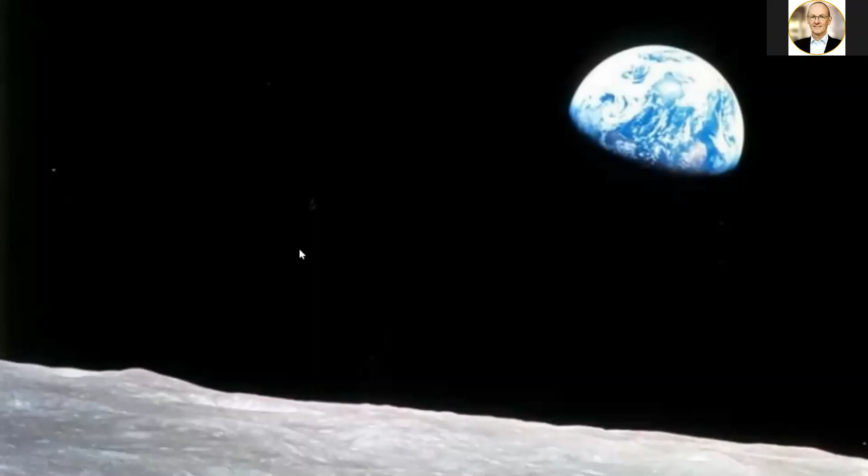So we start with the big picture, looking at the Earth from space, and think about the challenges facing us. The big challenge we have in front of us today is to stop this beautiful blue thing from looking like this dead grey thing.

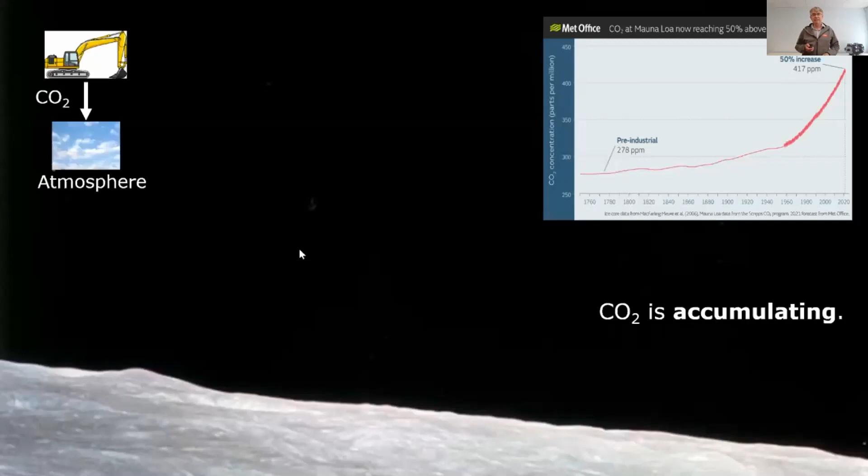And of course, CO2 is accumulating. Man-made CO2 is a huge challenge, and that is, if anything, accelerating. Sometimes it's tempting to think that we just need to cut down emissions and it will stabilize. In fact, CO2, when we emit it to the atmosphere, takes about 200 years to be absorbed in any meaningful amount by the sea, and then a further 10,000 years to turn to rock.

That really brings forward the urgency, the need to take urgent action, and the reason why this presentation is focusing on what we can do by 2030.

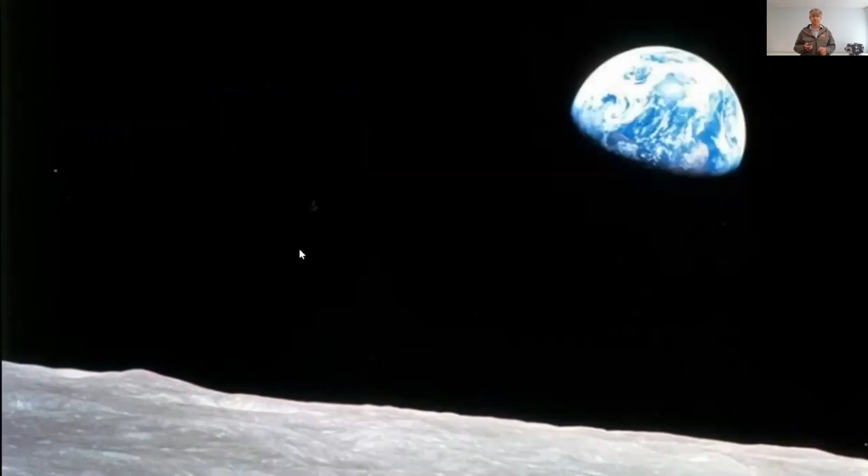As we see it, to avoid CO2 emissions accumulating in the atmosphere, we need a technology with highly effective emission reduction. We need that to penetrate the market to a significant degree, and we need that to happen as soon as possible. Those are the three elements of the equation we need to get right. It's not enough just to have an expensive technology that's highly effective but over the horizon, or never going to be commercially viable. We need to get all elements of this equation right to make a big impact.

So what is the total problem we're dealing with in construction machinery? Well, according to Danfoss internal calculations, it's about 400 megatons of CO2 emitted globally. And of course that's going up as the construction industry develops, with compound annual growth rate and the economy developing, that's only going to rise.

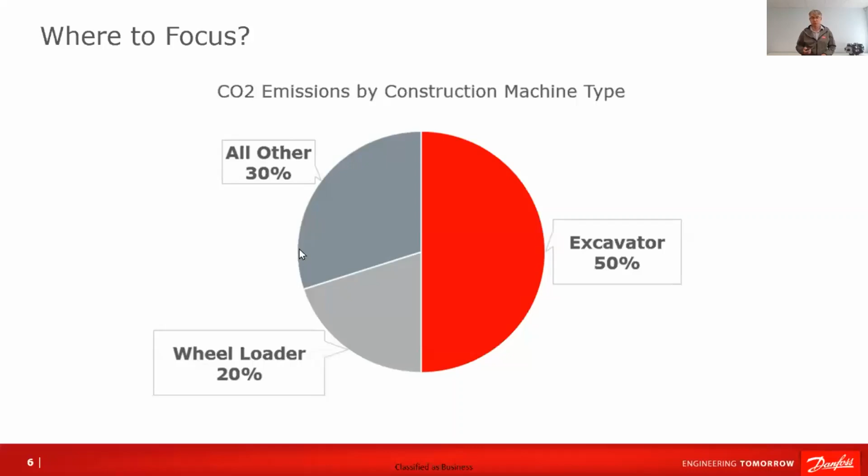In terms of where we put our focus, this pie chart is a bit of an indicator. For digital displacement, it's really focused us on the excavator, as the one application responsible on its own for 50% of those emissions.

So we've been talking in the last 6 months with some construction companies, some operators of fleets of excavators, and this is the sort of comments we're getting back. They're making their own targets to reduce equipment emissions, for instance 40% by 2030, but they don't know how to do it. They're being asked by some customers to produce bids with zero emission machines, but they simply can't get hold of the equipment. They're trying to procure less emitting equipment, but finding that the options out there just aren't there.

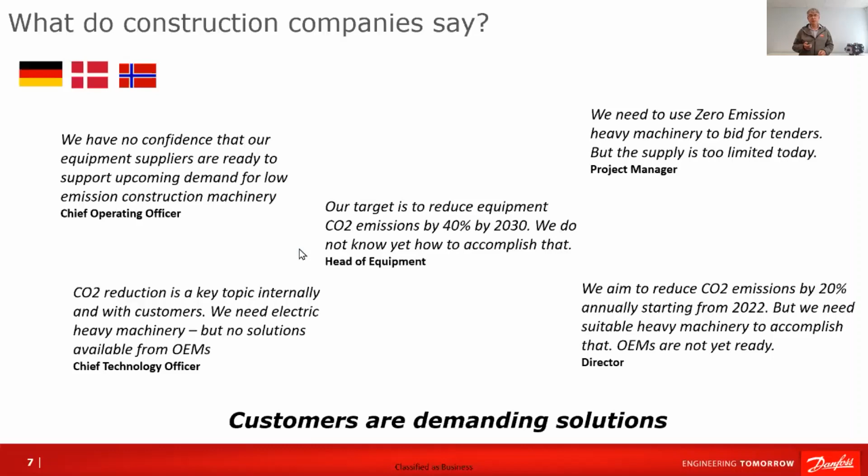On the other hand, many OEMs have committed—this is just a sample, and I think it's actually becoming a pattern across the board—OEMs are committing to science-based targets for the in-use emissions of the equipment they manufacture. Here's a sample of the sort of targets, typically looking at 2030 as a milestone and making some stretching targets there.

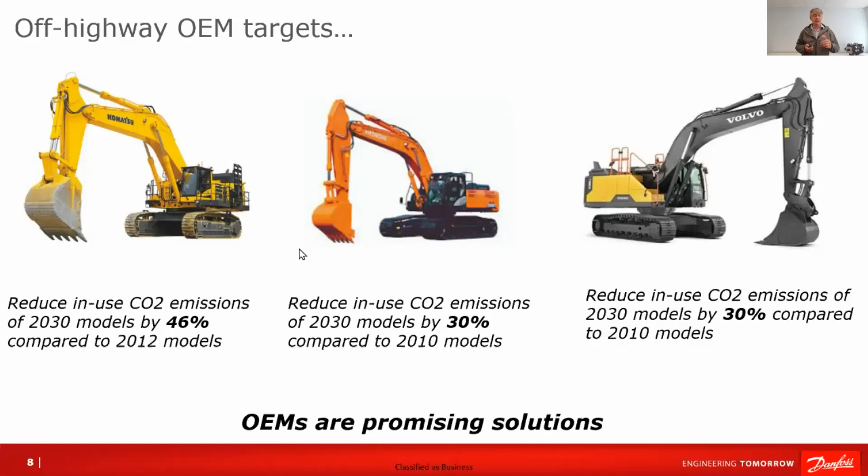So what's the solution? Well, the one that trips off the tongue, and that everybody maybe commonly assumes is the easy solution: let's just make them electric. We have green energy, offshore wind maybe for the UK, we use that to charge batteries, and we operate that green excavator using battery-powered, battery-stored green energy.

So yeah, sounds easy. But when we compare the challenge of electrifying, say, a 20-ton excavator with a typical family car, we see it's not going to be as easy as many people think. The excavator has a similar power plant capacity to the car, but a much more demanding system, with much more demanding actuators, and those actuators work an awful lot harder. The fraction of full power an excavator tends to work on is much, much higher than a family car, which is basically producing only 5 to 6% of its rated power on an average duty cycle.

The excavator, by contrast, is typically consuming 60% of rated power. So it's a very hard working machine, and of course it tends to work for much longer. As a result, when you multiply these things together, an excavator needs an absolutely massive battery, and that battery can be so expensive that it's more costly than the rest of the whole machine. And finally, it lives in this tough environment with poor charging infrastructure, which is a huge limitation on many job sites.

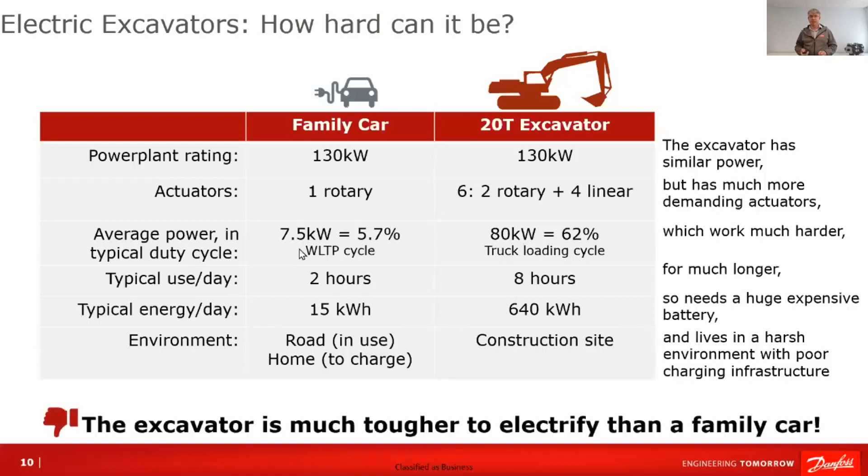There just isn't the electrical supply to charge these huge batteries overnight, especially because one of the first jobs of the excavator when it gets to the site is to dig a trench for the electrical supply. So the excavator is really much more difficult to electrify than a family car.

We could also ask the question, do we have enough green energy already? Of course, it's nonsense to charge a battery-powered excavator from fossil-fuel generated electricity. So that will be a limiting factor, and we can do some quick calculations to see if we're in the right ballpark.

We have roughly 1 million worldwide excavators in the field. When working, they take about 70 kilowatts to consume, working for let's say 1,500 hours per year. That gives us a total figure of 105 terawatt hours.

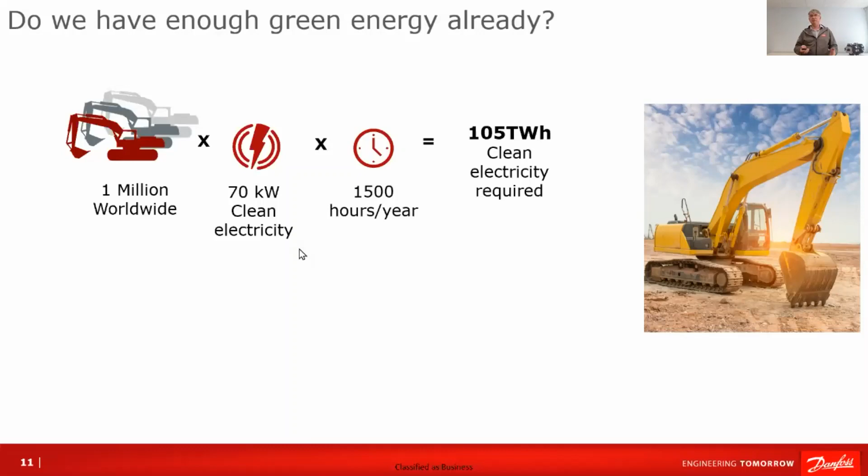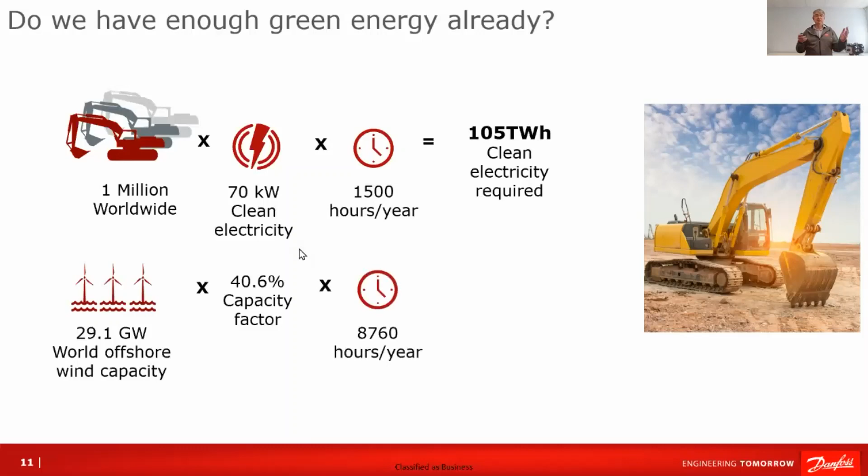So let's see what's available from offshore wind. There's about 29 gigawatts world capacity for offshore wind. It works at this 40% capacity factor, 24 hours a day, 365 days a year, and the result is about the same.

So the shocking figure is that if all the world's excavators were 100% electric, they would consume as much electricity as generated by the world's current offshore wind capacity.

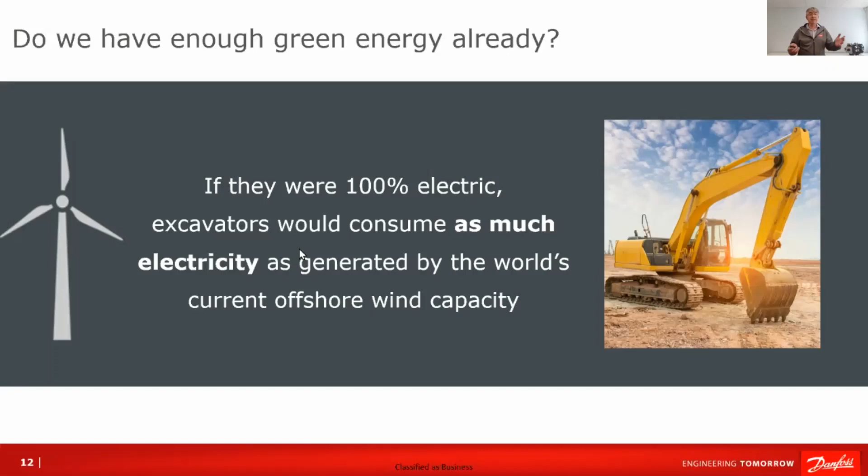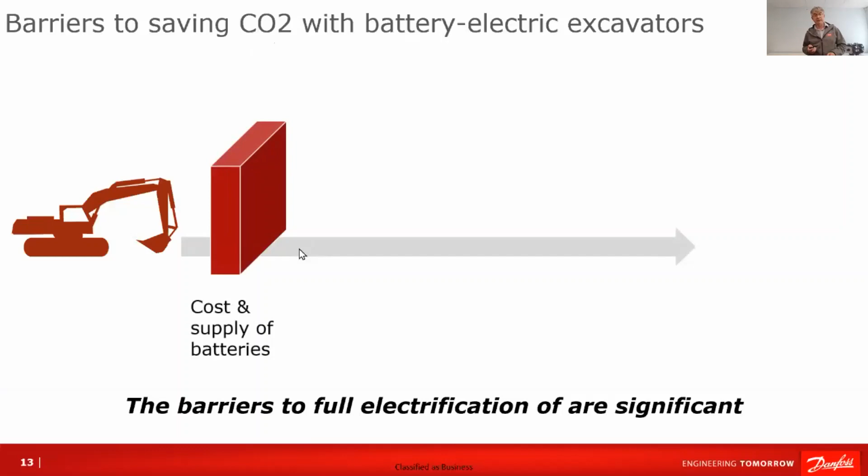So there are significant barriers to saving CO2 with battery electric excavators. One is the cost and supply of batteries, which of course will be competing with all the other consumers of batteries in on-road and stationary applications. The second is the lack of charging infrastructure where the excavators are actually used and stored overnight.

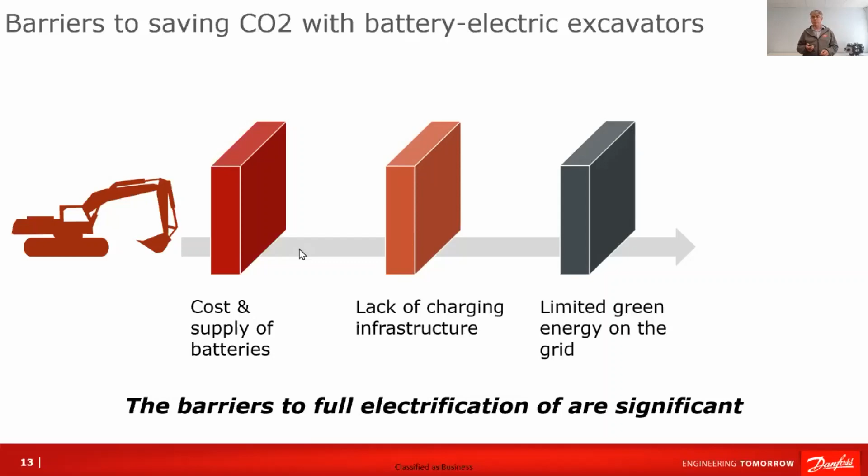And lastly, the limited green energy on the grid, which means that the growth of green energy powered electrified excavators will be limited by many other factors, including politics and government intervention to stimulate the growth of green energy. So there are real significant barriers to that electrification.

But to get a hint of what we can do—this is not a message of despair, but in actual fact there is a hint of what we can do, and it comes by looking at where the energy goes.

So let's look at the efficiency of transmission of the energy from that wind turbine to the end use. The wind turbine generates power that's then transmitted through the grid fairly efficiently to charge batteries. Those batteries can then drive electric motors very efficiently, and those electric motors themselves are very efficient. So far we have a very efficient transmission.

And then when we look at the city car, we have just a very efficient transmission coupling that electric motor directly to the wheels. And so overall, the city car is a very efficient way of coupling offshore wind energy into driving the wheels of a vehicle.

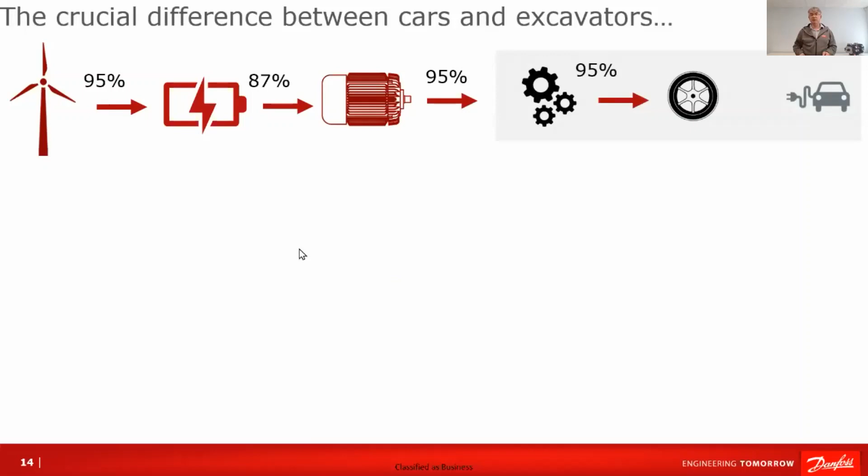But when we look at the excavator, it's rather different. Excavator hydraulic systems today—the shocking truth is that they're only 30% efficient. 70% of the useful energy generated by either the engine or the electric motor ends up as heat.

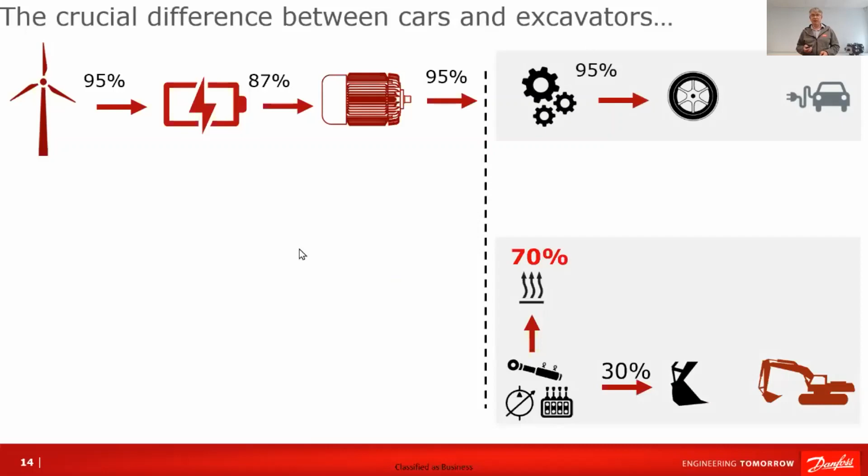And of course, heat you have to pay to get rid of. So this is a shocking fact. We could electrify all the world's excavators, but 70% of the useful power that we put in—that very expensive and valuable green energy—70% of that will be wasted as unwanted heat.

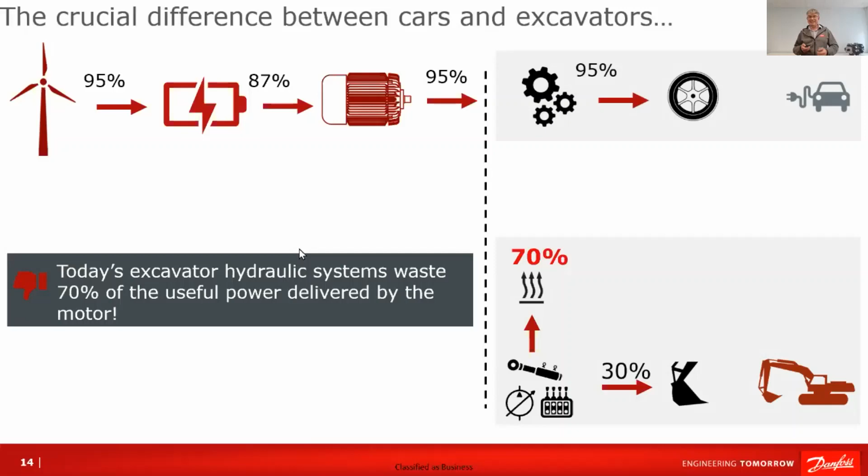And why is that the case? Well, it's to do with poor component efficiency in the hydraulic system, poor system efficiency, how the system is laid out and how it's controlled, and the fact that energy which could be recovered is not recovered. In fact, it's wasted and turned into heat.

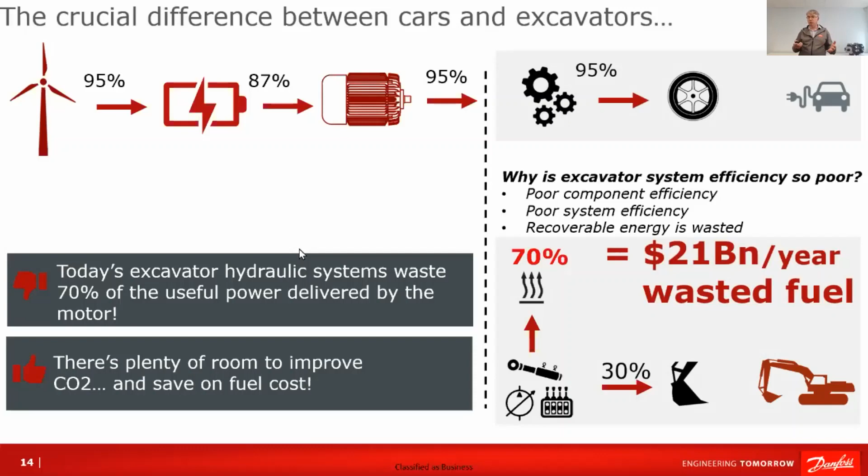So although it sounds like bad news, in fact it's good news. There's an opportunity here. There's plenty of room to save a lot of CO2 by improving that efficiency, but there's also a huge amount of cost opportunity. We've got $21 billion per year of wasted fuel—useful energy that's turned into heat that could be conserved.

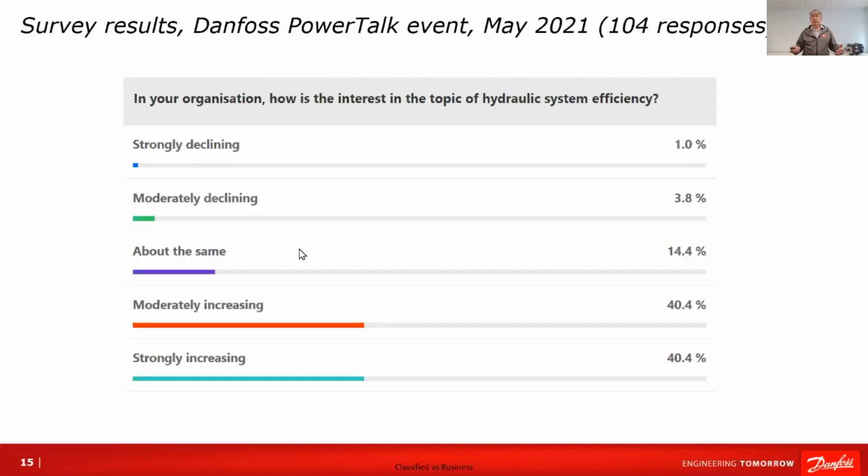And indeed in the UK, as the threat of diesel prices increasing affects the average operator, we could look at some solutions. And of course, everybody's thinking electric, so maybe the obvious solution is let's just go completely electric. Here's some sort of groundbreaking demonstrations that have been done in the last few years using electromechanical actuators.

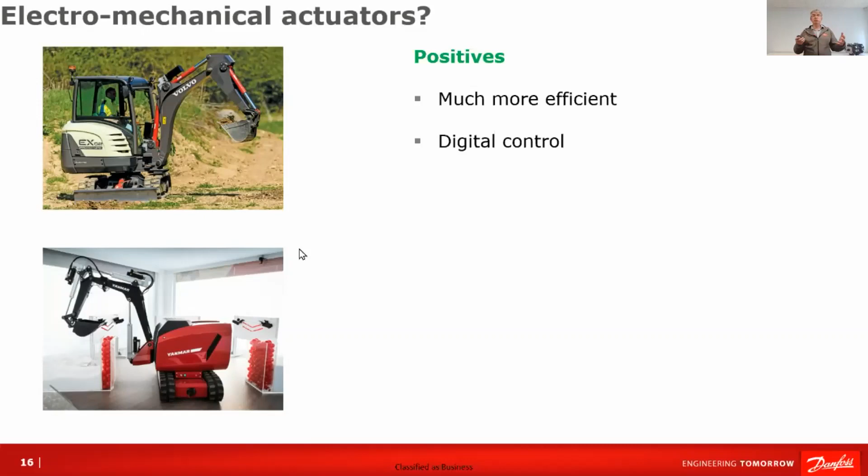Typically an electric motor, ball screw, or other mechanical mechanism moves the actuator instead of using hydraulic fluid. The positives are these systems can be much more efficient, and you get the electrified digital control benefit, so you can easily automate and have a better control experience for the operator. But there are negatives.

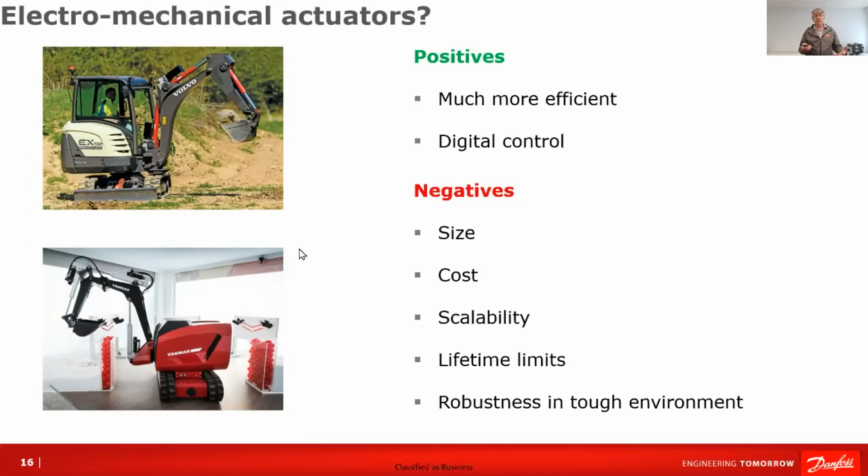Significantly, you can see on these photographs, these are very small machines, and already the actuators are huge, much bigger than the hydraulic cylinders they would replace. The cost of these systems tends to be prohibitive. There's questions about scalability, these demonstrations have been done in the 2-3 ton range. Will it scale up to 20, 30, 40, 50 tons that we need for large excavators? And there's fundamental questions about the lifetime of these actuators, especially in the tough environment of an off-road machine.

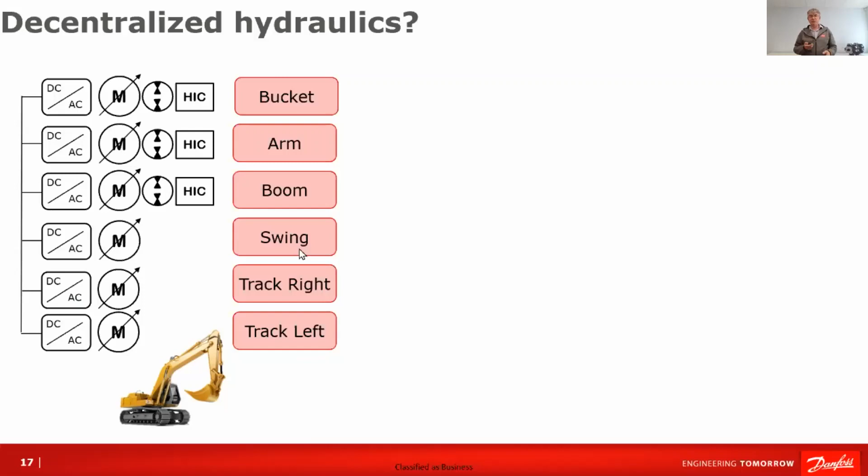So there's another option some are looking at, which we call decentralized hydraulics. We say, let's stick with the hydraulic actuator we know and love - it's very robust, power dense, and actually quite low cost - but let's improve the hydraulic system that feeds fluid to those actuators. Here's one idea: instead of having one pump and valves controlling flow to the actuators, you have multiple pumps, each fed with their own variable speed electric machine, connected in a DC bus and supplied from the battery. The positives of this system: you can improve the efficiency.

What we're talking about here is that the electric machines will not share their DNA with the diesel machines, meaning manufacturers will be investing in a completely different technology path. The question is, do we leave diesel machines behind? What if diesel machines are actually 95% of the market and therefore 95% of the emissions? Are we improving enough by focusing just on the electric fleet? Don't we have to improve the diesel fleet as well? So that technology divergence is one of the issues.

So that's the problem - we're going to give you some solutions. First, I'm going to hand over to my colleague Markus, who's going to introduce Danfoss's view, and then we're going to tell you what Danfoss can bring to the table as a solution.

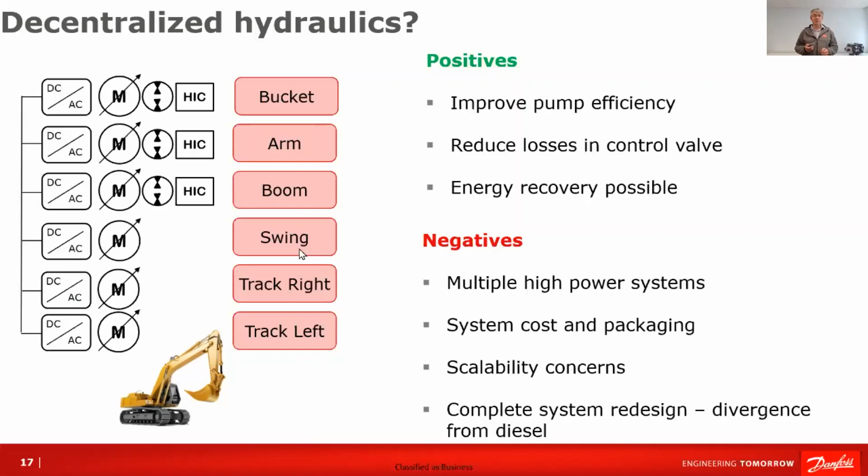I want to tell you something about who Danfoss is and what Danfoss is doing. What we do is we engineer tomorrow - we engineer solutions to enable the world to do more with less. That means we are developing the right technologies in all areas when it comes to heating, cooling, drives and power solutions. To do more with less - that's what Danfoss is doing.

We also have a climate strategy at Danfoss, which is quite ambitious and bold. This means we aim to become CO2 neutral by 2030. All Danfoss factories shall become CO2 neutral at the latest by 2030, and all company cars should be electric by 2030. So there are some ambitious goals Danfoss is setting for ourselves, and that's quite good.

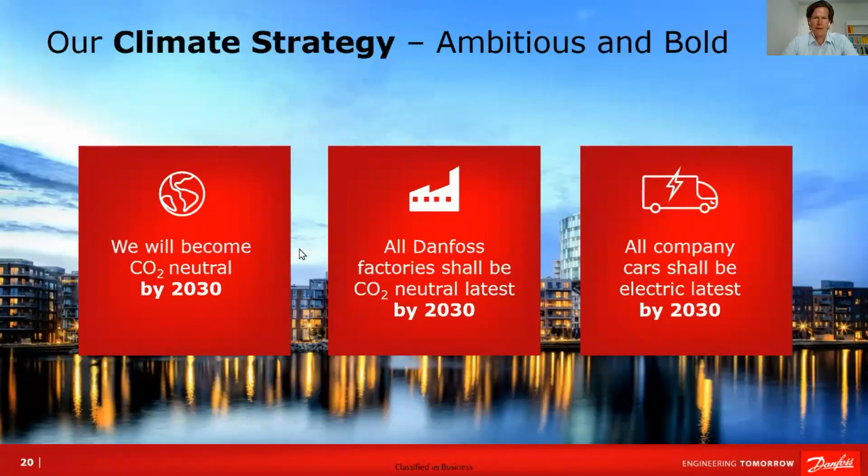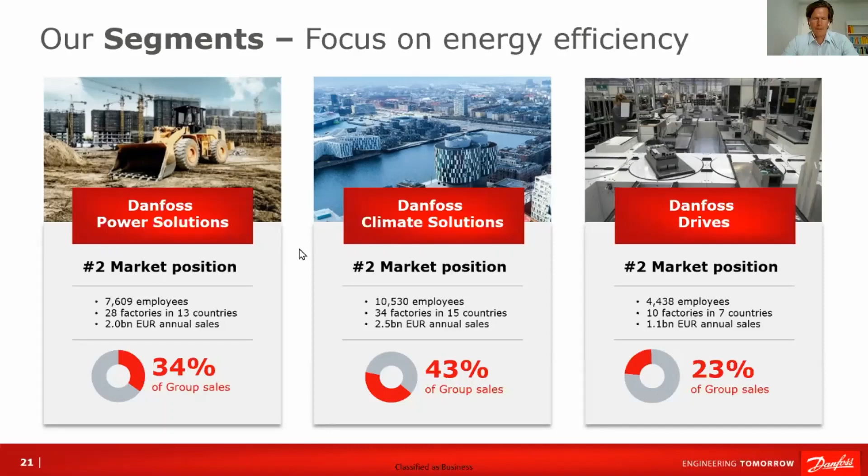So what are the areas Danfoss is in right now? We have 3 segments where we are active. One is Danfoss Power Solutions, the area where Niall and I work, where we are the mobile leader for mobile hydraulics for work machines, construction, ag machines, material handling and so on - for hydraulics, but also electrification as a complete solution provider. Then we have another segment called Climate Solutions, which comes down to heating and cooling solutions. And then we have Danfoss Drives as a segment, focusing on power modules, drives, and power conversion. So these are the 3 segments, and as said, we really try to become efficient in all areas, focusing on energy efficiency.

So when we now do one level deeper and do a deeper look into Danfoss Power Solutions, we had like 2 billion in sales and 7,500 people roughly in 2020, and this is the status of today. We are active in the global world here, but as you might have heard from the news, we are acquiring Eaton Hydraulics, and this does mean that our sales figures and our employees will change dramatically in a short time. Our top markets are USA, Europe, and China.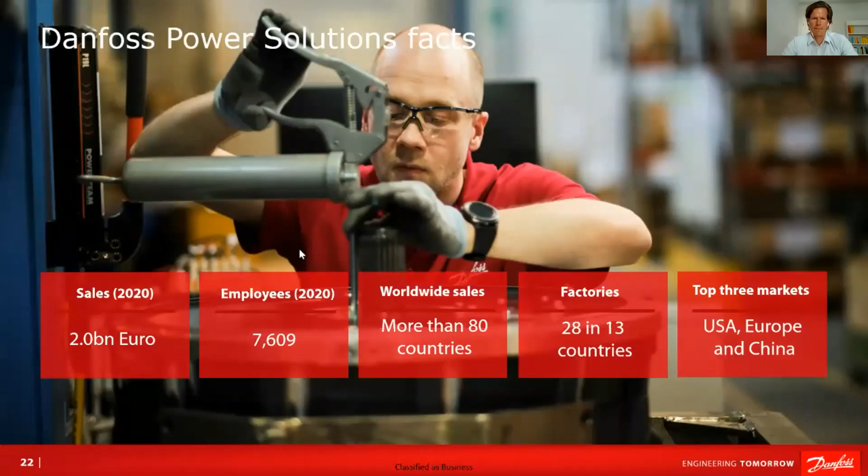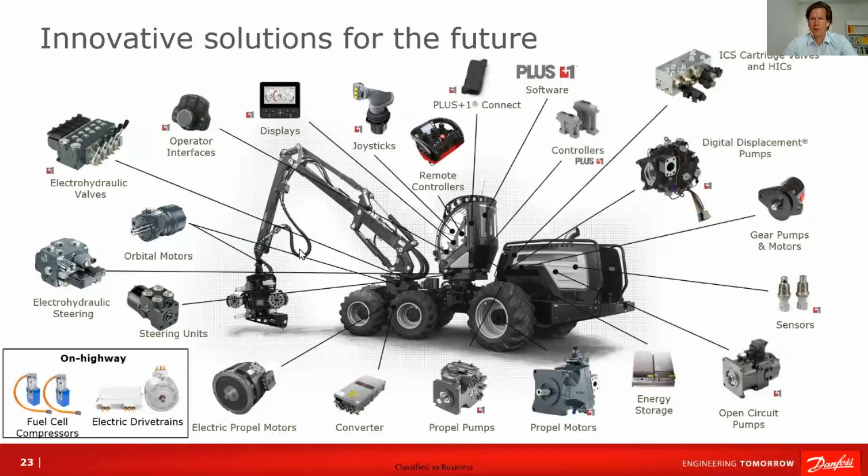From a portfolio point of view, what Danfoss Power Solutions is doing is really providing the core products, the solutions, the software to make all machines move on a propel part, on a traction part, but also work function part. This in the end comes down to core products like the pumps, the motors, the valves, the steering units, but also control areas like control units and software. And there we also added, since a couple of years now, the electrification portfolio, like motors, machines, converters, inverters, and also the digital displacement pump, to make all those machines effective.

So now I would like to spend a bit of time on, we have a challenge as mentioned, and now how to reduce excavator CO2 emissions, and give an outlook to 2030.

So 400 megatons, mentioned by Niall as well - that's the global annual CO2 emissions by construction machines, so quite a big number. And if we now look down, what does it mean from an excavator point of view, production volume? On the left side, you can see that the annual production volume for excavators is increasing from today's 600,000 machines up to 700,000 machines in 2030.

And then if you look on the right side, that's a quite interesting picture: the split by smaller machines below 10 ton and the bigger machines above 10 ton is almost the same - 44% for smaller machines and somewhat more for the bigger machines. That's how those machines are split today.

But if you then look into how the CO2 emissions are accounting for these machine types, you can really see that the larger machines, the medium and large equipment, are really contributing to a large amount of CO2 emissions. So that's what we are seeing.

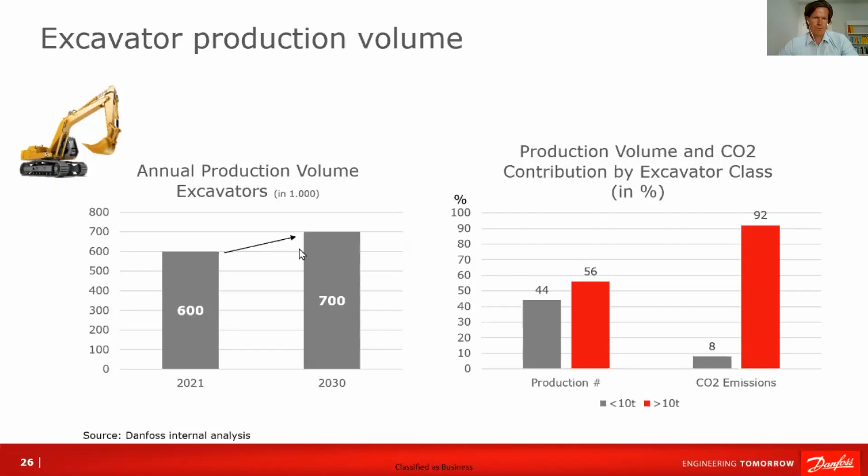And how do we now really get down our CO2 emissions by 30% in 2030? We have done an investigation, a TCO calculation, and we considered the average lifetime CO2 footprint for excavators produced in 2030. We know that we need to reduce our CO2 emissions by 30%. We have considered our CO2 footprint, including manufacturing and operation phase - so the complete TCO from cradle to grave. And then we also included the carbon intensity of electricity supply.

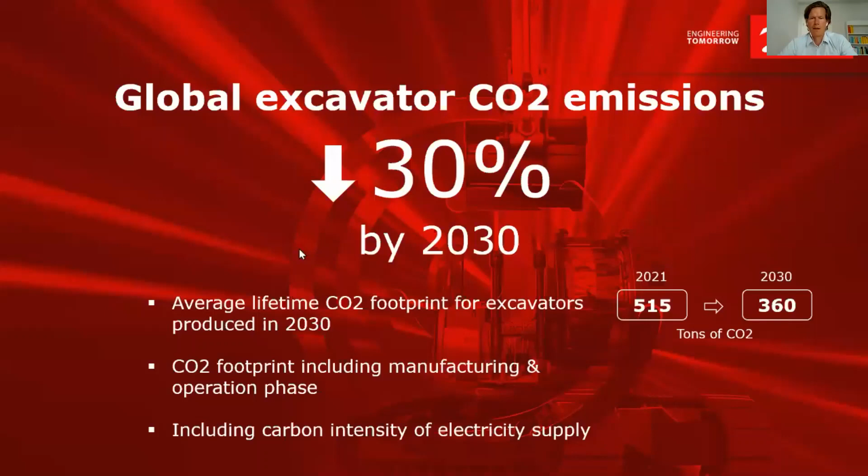And in the end, what we found out is that in order to really achieve a 30% CO2 footprint reduction, what should we do? If we just look into a focus segment of excavators and consider the 10 to 35 ton excavators, then we definitely need to look into machine efficiency, to really increase efficiency of the machine, but then also electrify. And this will contribute to the overall lower CO2 emissions.

And this does mean we would need to increase the efficiency by 50% - of 30% for 50% of the machines, and that's then in the end 150,000 excavators. But also, on top of this, we need to electrify at least 40% of the excavators. When doing this, we could contribute to the 30% CO2 footprint reduction overall. So it's a quite ambitious goal, to be done in 10 years. I think it's a quite ambitious goal, but this should be done in order to get down the emissions.

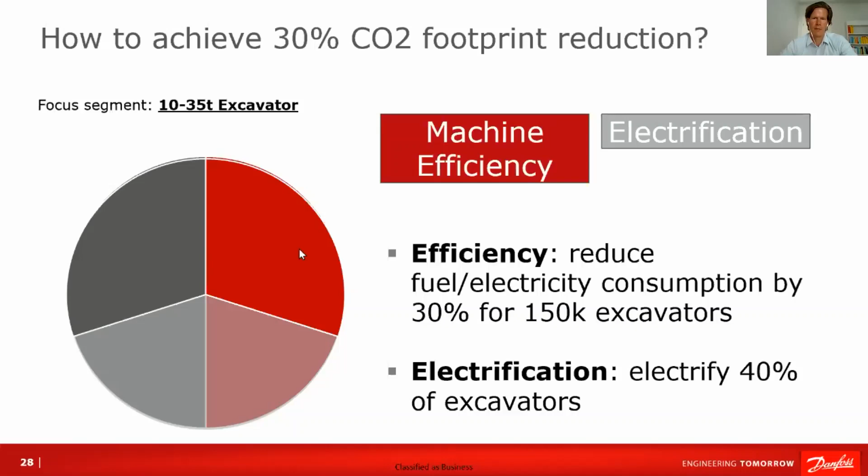And where are we today? If we just look at today's view, I think we can see a lot of machines electrified on the mini excavator side, so small machines. There we see a big movement and trend in the market.

But if we then look into the medium duty and heavy duty excavators, in this case like an example of a 25-ton excavator, we have done some TCO calculation, and what we are seeing is that the conventional machine, the machines today, are definitely less cost intense compared to the battery electric vehicles, because this means that you have a lot of energy demand in the machine, and that means you need to install a big battery pack in order to operate the machine during the duration of a day.

This does mean the machine becomes more expensive, due to the battery cost today, but also the fuel price, which is today also at a low level. That's the main reason why from a commercial point of view the business case is not viable, and therefore it's really driven by regulations and incentives from governments.

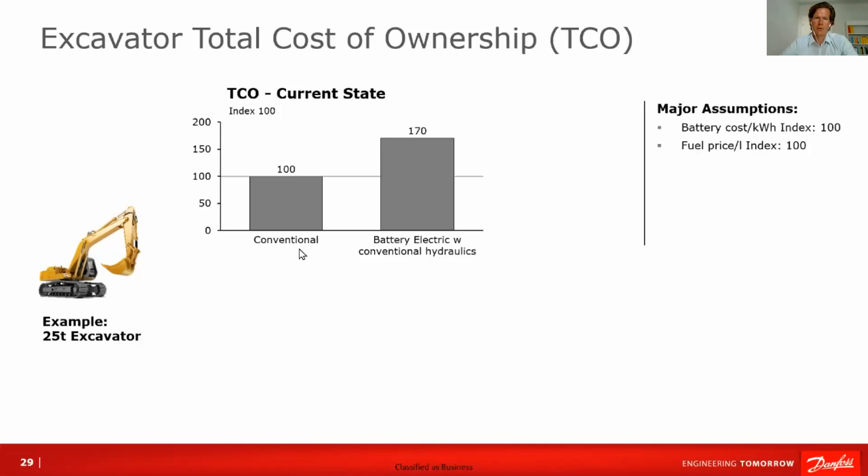But if we look into the future state, a 5-year outlook, we are seeing a trend that battery costs are going down dramatically. We also see that fuel prices will go up due to government initiatives and regulations. Therefore, even comparing today's machines to battery electric machines with conventional hydraulics, in future the difference is lower compared to today's point of view.

Therefore it becomes commercially more viable in 5 years to electrify the machine, leaving the conventional hydraulics in there. But there's also a chance to get a lower TCO by improving the whole machine architecture, not just electrifying but also integrating digital displacement hydraulics into the machine. There we have potential to really come down on the cost of the conventional machine today, based on lower battery cost and higher fuel price in 5 years. So there's a chance commercially to make those machines attractive, electrify and make hydraulics more efficient, and also make them commercially viable.

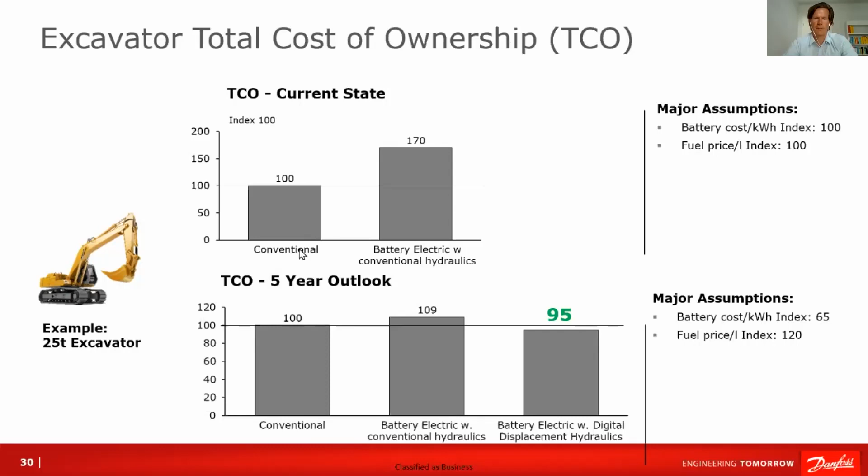Now we would have the first question, based on background shown by Niall. The question to you would be: what fraction of new sales of UK construction equipment will be either battery electric or hydrogen fuel cell by 2030? What's on your roadmaps, and what do you see in the market as a trend? How many machines are converted from today's point of view into the future?

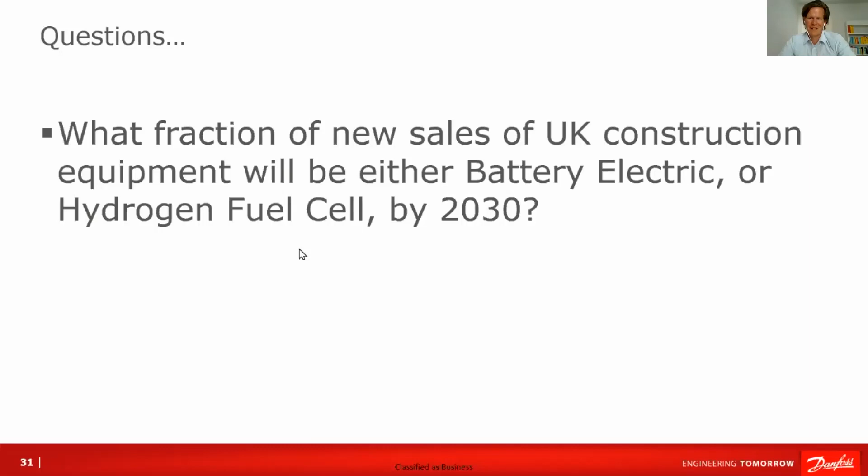So then let's spend a bit of time on the challenges on the machine level — how to maximize efficiency and productivity while minimizing TCO.

If we look into the complete chain from energy source up to productive work, we are seeing a lot of losses in the system. We just use 40% of the diesel out of the engine output, and then we have the working hydraulics, which is also an inefficient system since the product at the system level is not super efficient. In the end we use just 12% of the input energy source, which is diesel, for productive work, so we have a lot of losses, like 88%, in the whole system. That's what we see today in these conventional machines.

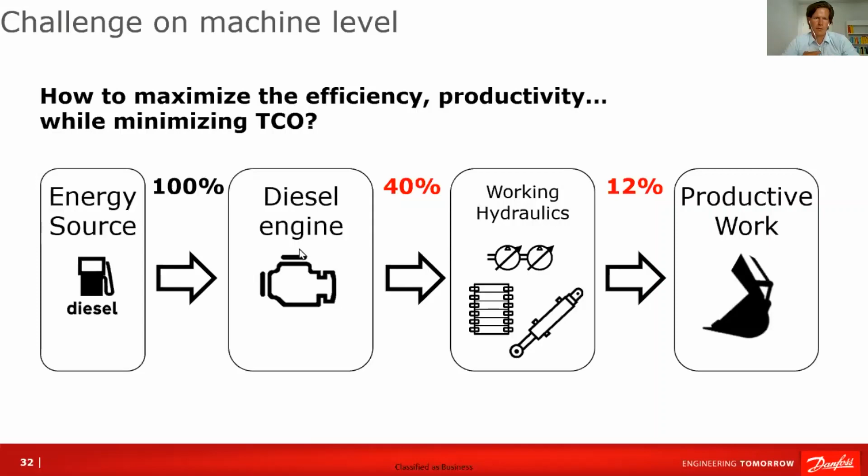If we look into what we can do next: as a first step, we can replace the engine. This means changing the energy source from diesel to battery or hydrogen as one example, and then we have the electric drive system as the prime mover. Then we can utilize 90% of the input energy source for driving the hydraulic circuit.

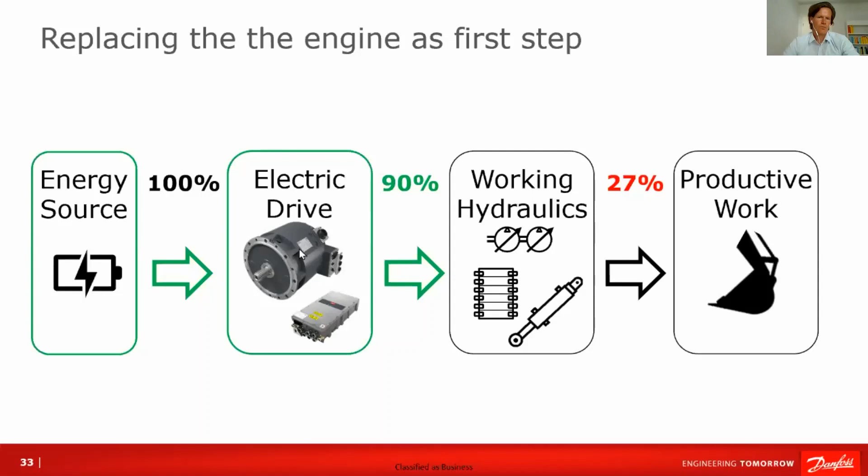Danfoss has a new division also in that area. Just a short picture here about the Editron system portfolio - that's really electric machines for traction, for generators, electric converters to drive a motor, to make a DC-DC conversion, and even a grid connection, so you can connect a stationary machine to the grid as well.

The complete system is designed for off-highway use and rough environments. It's really super compact, robust, and highly efficient, and optimized for these machines.

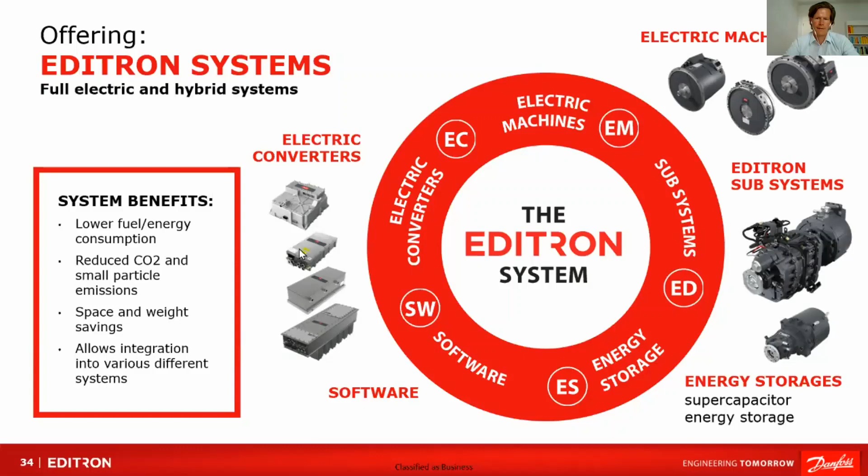To show you one example, in Norway - which is known for pushing down emission limits and bringing in electrified machines and cars quite fast - there are excavators now working in Oslo that are fully electrified. This machine was an easy swap of the ICE: the engine was taken out, a big battery pack was put in, along with our Editron system to power the machine. So it's a full electric machine operating in Oslo, Norway, and now more and more machines of that type are being produced.

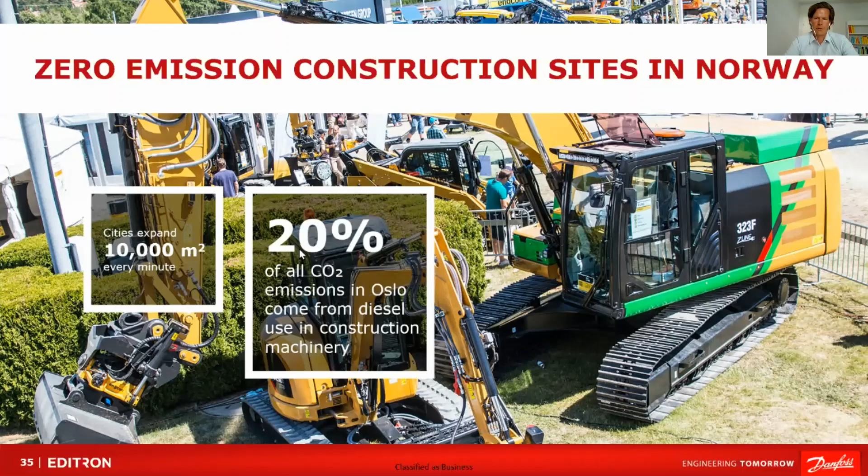Next slide. Now I think Niall will take over again and explain the next steps. We've talked about the first step - replacing the energy source and bringing in the electric system - and now we focus on the hydraulic side.

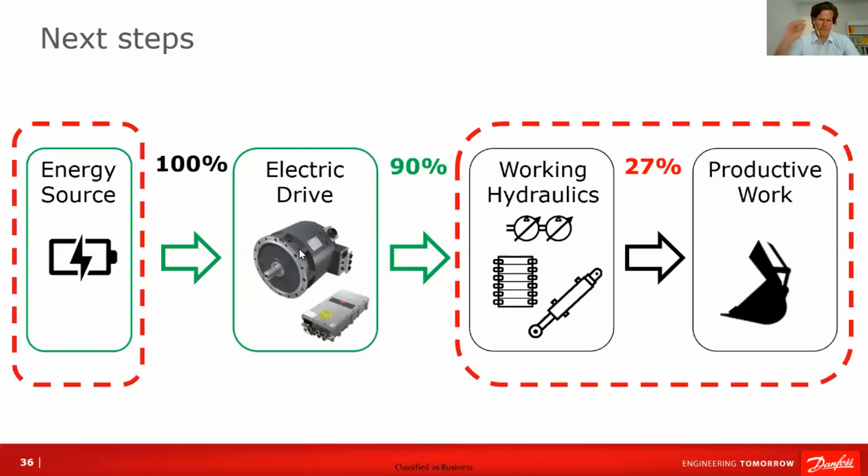Thanks, Markus. So talking about the hydraulic system, let's look at the conventional technology of today - what I call analog hydraulics.

Here is an animation of a typical axial piston swash plate pump, as would be found at the heart of the hydraulic system of a typical excavator today. That machine is controlled by varying the stroke of the pistons - it's basically an analog mechanism, and that leads to a limited energy efficiency potential for this type of component.

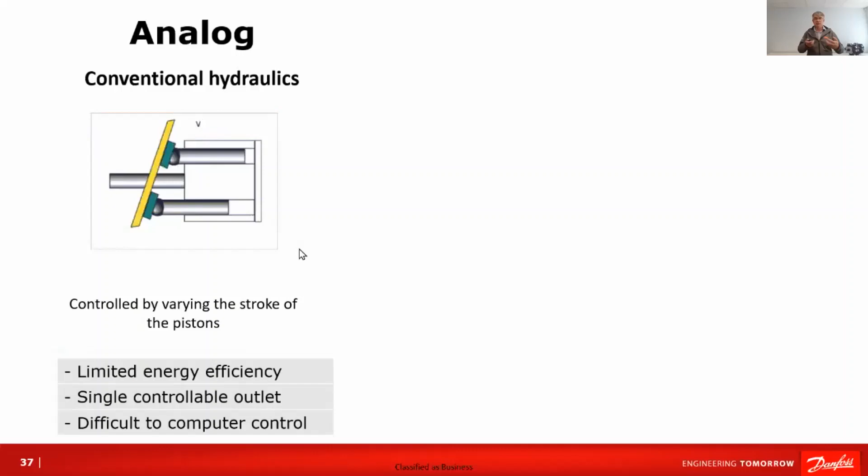Because it typically only has a single controllable outlet, controlling all the multiple actuators of an excavator requires valves in between. Valves basically work by wasting energy - that's how they throttle. Because of that system architecture, the excavator system is inherently going to be of low efficiency. And lastly, these analog pumps are rather difficult to control by computer because they are fundamentally analog mechanisms - interfacing them requires a lot of signal conversions and extra complexity, and ultimately they're still analog at heart.

So we introduce the Danfoss portfolio technology to solve these problems, called digital displacement. It's a fundamental reboot of hydraulic pump technology - a radial piston machine controlled by enabling and disabling cylinders in real time. That's a purely digital process. There are no variable mechanisms or proportional analog mechanisms in the system - it's done using computer-controlled valves. So this is basically a software-controlled machine.

That brings many advantages at the system level, including higher efficiency, better control of the engine or prime mover, and it basically behaves like an electrical inverter from the system level. So it's the hydraulic pump that electrical engineers love.

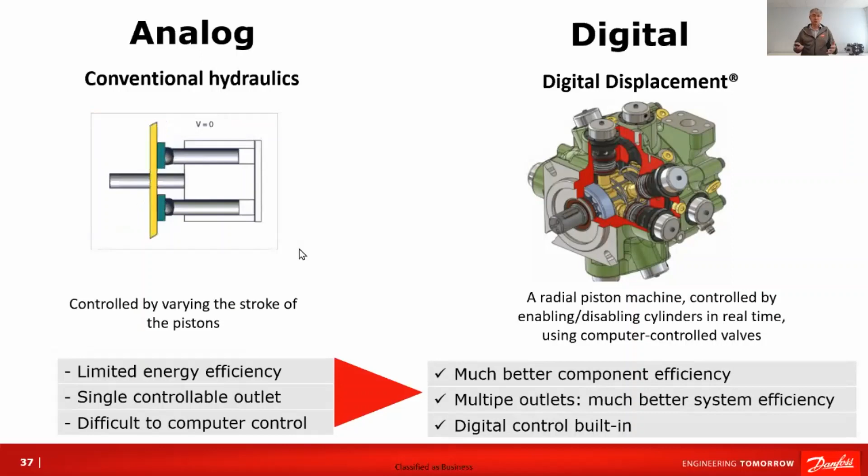The advantages of that: much better component efficiency - typically a third to a fifth of the losses of the axial piston pump, so a real dramatic cut in the amount of energy wasted at the component level. But also, because of these multiple outlets, it gives a much better system efficiency - I'll show you the potential there in a minute - and it has this digital control built in.

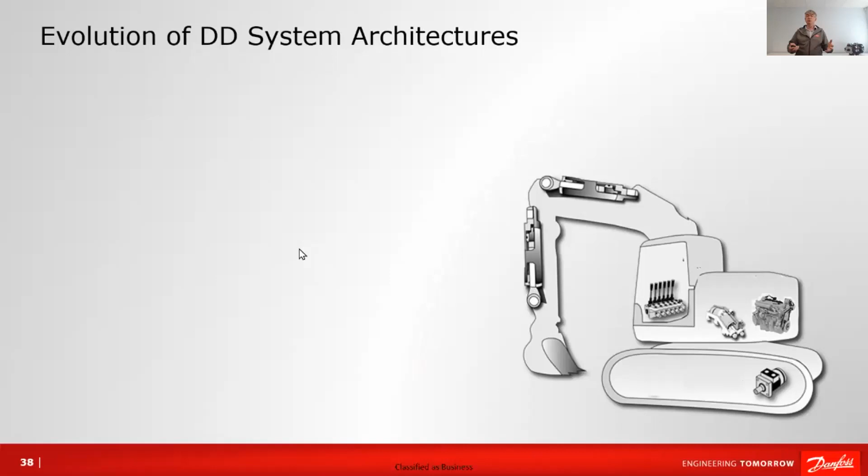So how we're bringing this to the market is in a series of stages, because we're not talking about a revolution here - we're trying to describe what we would call a green evolution. Step by step we can introduce the technology, make incremental improvements, and establish a baseline and familiarity in the market, in service, with designers and end users. So we start off with what we call SA1, System Architecture 1 - that's simply swapping the analog pump out and putting in a digital pump.

That can also give some benefits in terms of control. So as well as improving efficiency, it can also improve the productivity of the machine.

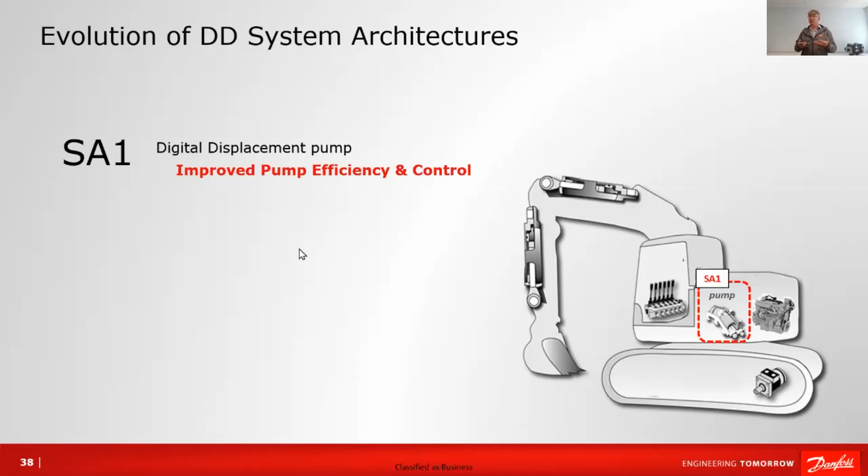Improving efficiency saves fuel, and that's money, but improving productivity saves time, and that's also money. So if we go the next level up, we can use some features of digital displacement to reduce the losses in the valve block. This is what we call the SA2. We make use of these multiple independent outlets to redesign the hydraulic circuit. We still typically have proportional valves to control the actuators, but we change how those valves are supplied from the pump, and we reduce some of the system losses.

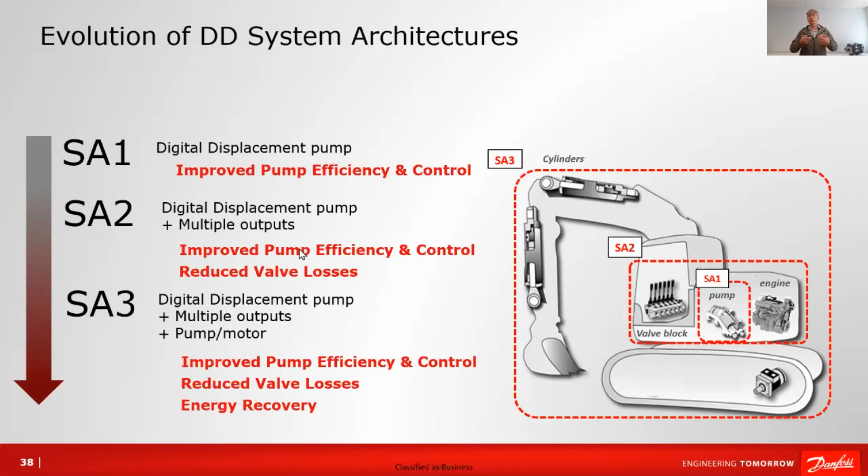Moving on to the future, what we're working on in the lab at the moment, and expecting to reach market in the 5 to 10 year region, is what we call SA3, where we eliminate completely the losses in the proportional valve. We control every actuator directly from the pump. That also allows us to start recovering energy that would otherwise be wasted, for instance in lowering the boom or in swing.

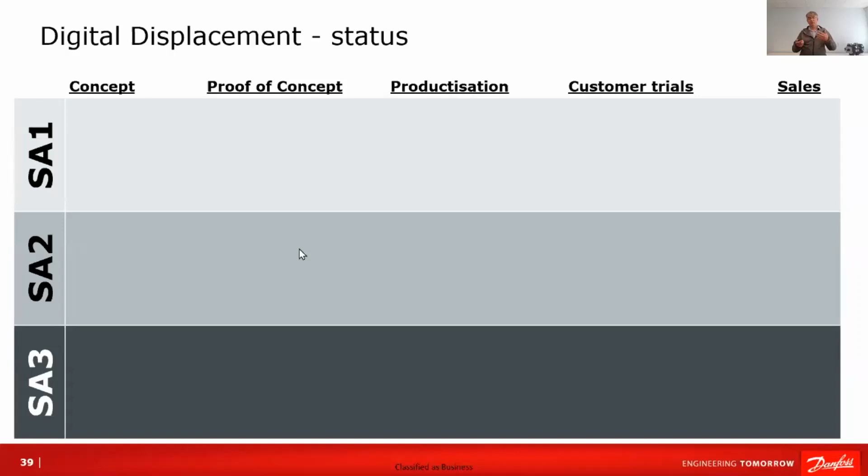In terms of development and commercialization status of these three levels: in SA1, we've demonstrated recently about 15% fuel savings on a modern excavator and 15 to 20% productivity improvement. Those fuel savings are gained even in a hard digging cycle or a cycle involving a lot of swing. So this is not like the electric hybrid systems we've seen, which are very sensitive to the duty cycle. This is an across-the-board 15% that we can expect here.

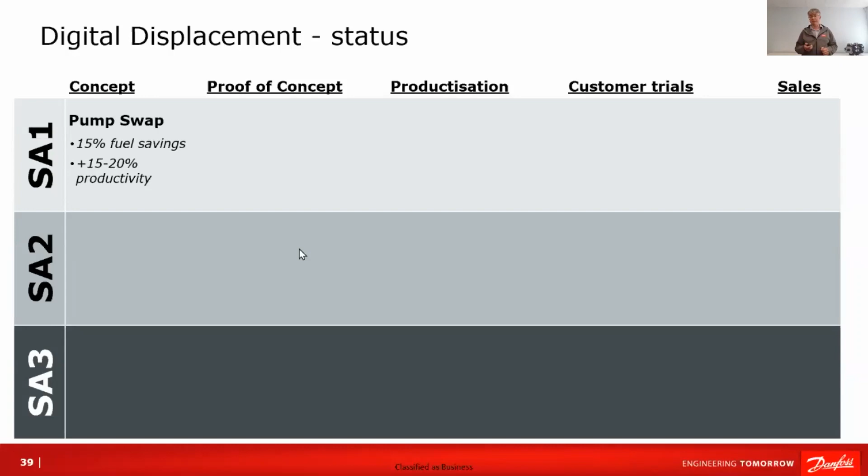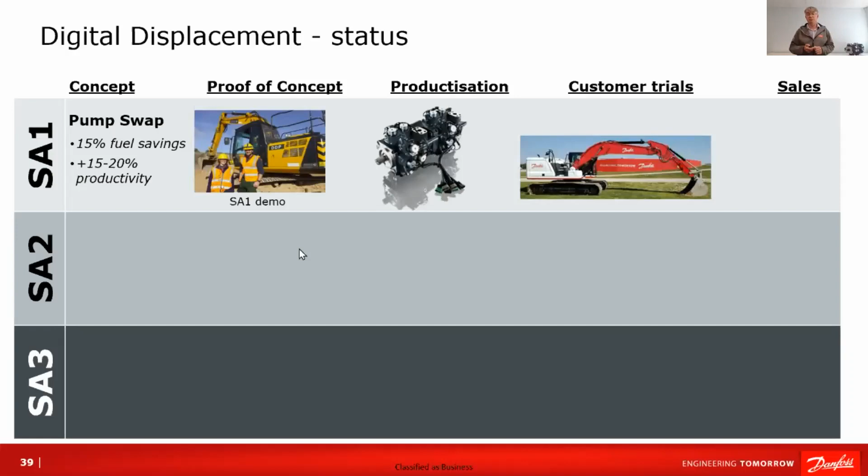So we've done proof of concept, back about 2016. We did those demonstrations and taken the lessons to productize it. The first product we've taken to market is called the DDP 096 Tandem, which you can see behind me in all its beauty. That product has been taken to customer trials, and we're now in the sales phase, getting lots of excitement and engagement there.

We look at the SA2. Here we've demonstrated over 30% fuel savings compared with that baseline system, and 20 to 25% productivity improvements. Again, you waste less energy, there's more useful energy to do work, and that can really turbocharge the machine from the operator's point of view.

So we've done a demonstration there and published the results towards the end of last year with a paper. We've taken those results and created a productized version, which we're now demonstrating to some OEM partners that we're working with, to put that product into their machines and demonstrate it at their facilities. Those projects are going very well, already getting very exciting results back.

Then we look to the future and the SA3 architecture. Here we think we can get up to 50% fuel savings, again by reducing losses but also by recovering energy from the system. And of course, huge productivity savings are possible there too.

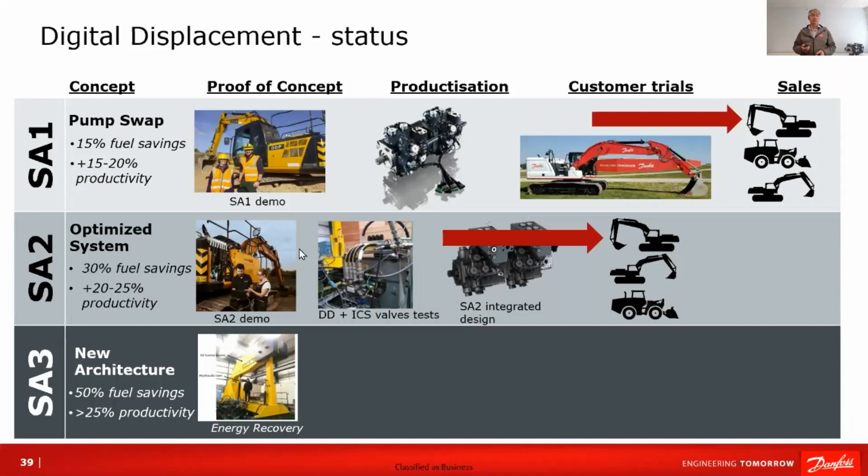There we're at full scale in the lab, demonstrating the elements of this technology in a building-block way. We've demonstrated recently very efficient energy recovery, and we're working on a new pump called the DD180, a much bigger pump suitable for the 25, 30 ton excavator range. This machine is designed from the ground up to have these multiple outlets to enable more advanced systems, and indeed to enable energy recovery.

That machine is now undergoing tests in our laboratory. We're going to be benchmarking it against conventional analog pumps towards the end of this year. We're already working with a number of OEMs and sharing the excitement of that, along with the interim results as we get them.

That work is supported by the Advanced Propulsion Centre in the UK, and we're very grateful for that support. This has been fantastic, and indeed that support from the APC has encouraged Danfoss to invest further into its footprint in the UK, with a very recent announcement of a new building in the Edinburgh area, a low carbon innovation centre, which will house both digital displacement and Editron engineers working on low carbon innovations. It's fantastic that we got that support, and that it's encouraged Danfoss to make a real permanent footprint in the UK.

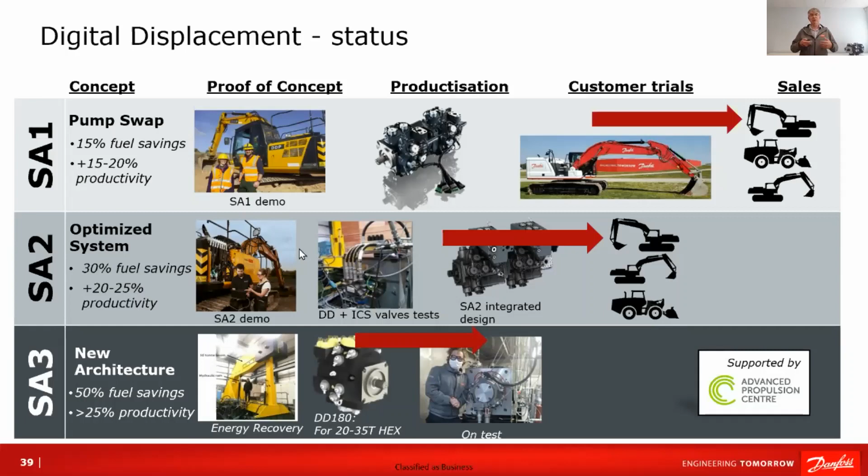So what we've been working on in the lab quite recently is a demonstration combining what we say is the most efficient electric motor and inverter system from Editron with what we say is the most efficient hydraulic pump, the digital displacement pump, combining those together to really see how efficiently we can convert DC power from a battery into fluid power that can make an actuator move.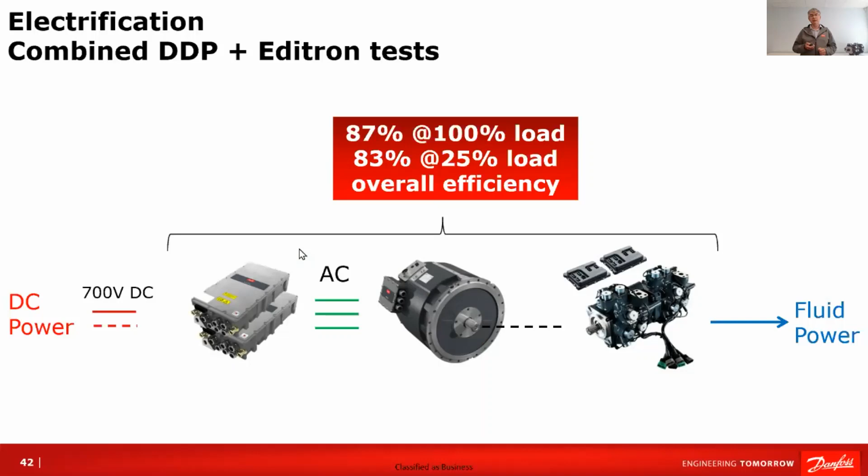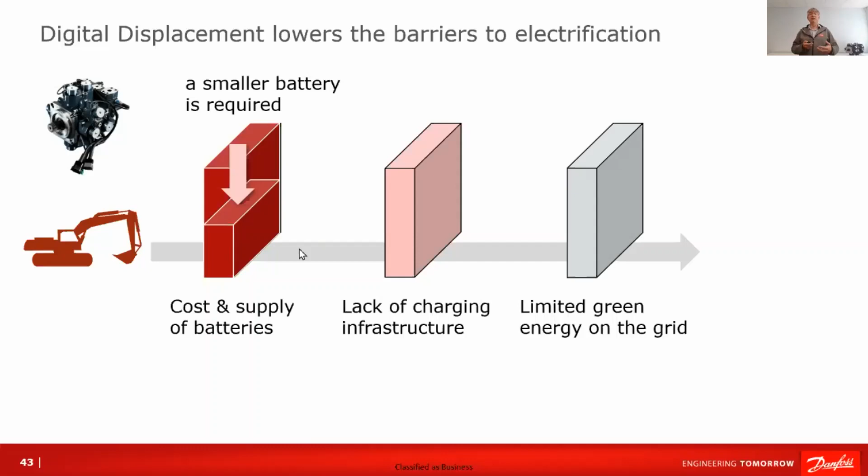Looking at the barriers to electrification we discussed earlier, we can see that if we improve the system efficiency using new technologies, then we can reduce the size of the battery required. Less energy wasted means a smaller battery, which improves the initial cost of the excavator. And with a limited supply of lithium or manufacturing of cells, you can actually electrify far more of these heavy machines.

Secondly, if you've got a smaller battery, you need less charging power overnight at your work site, which is a major limitation, as we've noted. So you could get way more machines on a typical work site with the given limited charging infrastructure, just by reducing the amount of waste.

And then lastly, there's limited green energy on the grid. If we need less charging energy, we're wasting less of that precious green energy, and that really helps. It means we can make much more impact in terms of CO2 reduction for a given amount of green energy investment, which is a real multiplier on some of the other actions governments are taking to incentivize production of that green energy in the first place.

So really we see it as a two-pronged approach. We need more green energy, but we also need to make sure that green energy is not wasted. Green energy should power green machines, which are highly efficient.

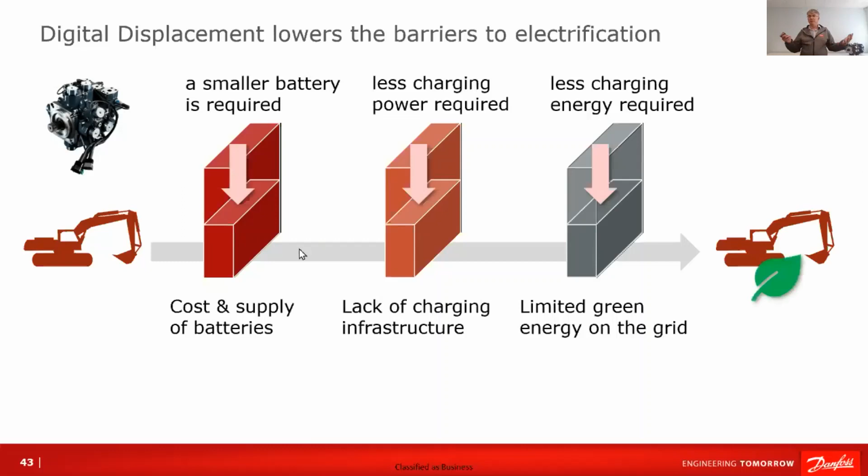This last point I want to emphasize: what we're proposing here is to improve efficiency with a technology shared between diesel and electric variants. The power of that is that in the short and medium term, diesel will dominate the market, especially in larger machines. So by improving system efficiency with this technology, we can make a big impact on CO2 in that short and medium term.

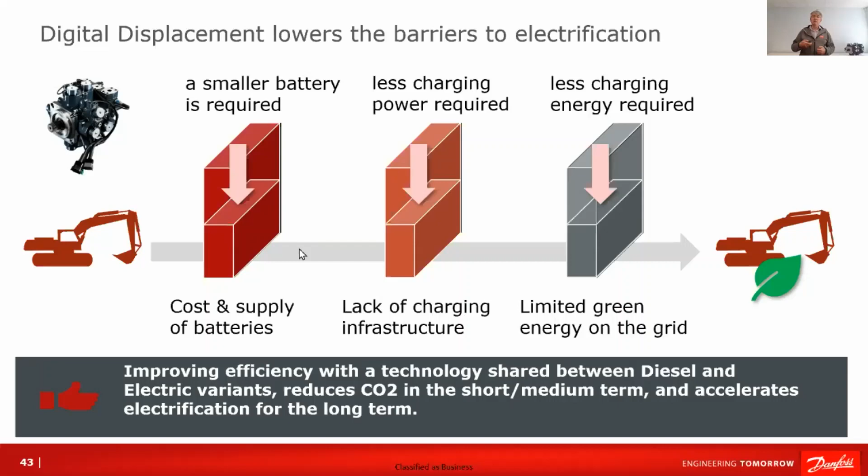But also, by improving system efficiency, we lower the barriers to electrification, which will accelerate it. So it's a double act, if you like, of efficiency helping in the short term but also helping accelerate electrification.

One way to think about it, maybe from the government or regulator's point of view, is that today incentivizing electrification is like pushing a rock uphill, because what's forcing the rock down the hill is market forces. As Markus has said, today electrifying off-highway machines is much more expensive, so it's much more difficult to persuade end users and operators to adopt this technology against such a strong market force.

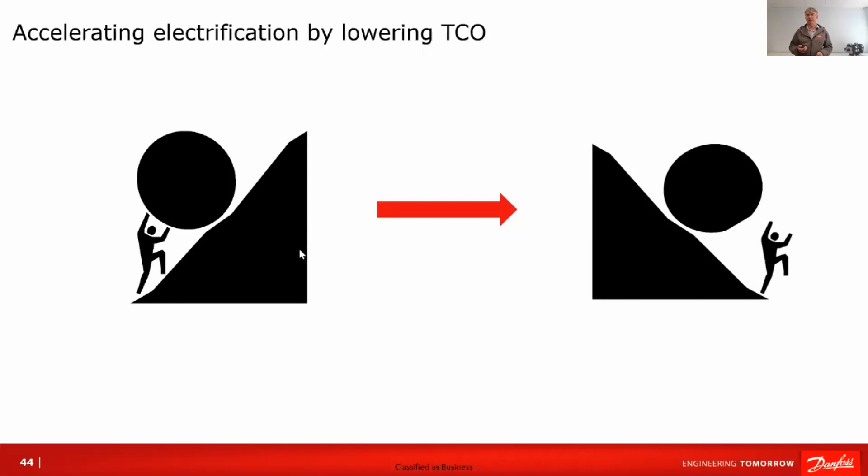What we want to do, by lowering the cost of electrification through improving efficiency, is reach a tipping point where electrification is actually cheaper. As Markus has shown, we can get towards that TCO advantage for electrification until it simply works on a straight business case. We think that's when the takeoff point will be, and getting towards that tipping point, we believe system efficiency is the key.

So, in summary, thanks for your attention. Hope you've enjoyed our presentations today. I just want to come up with some final thoughts on the way ahead and summarize some of this.

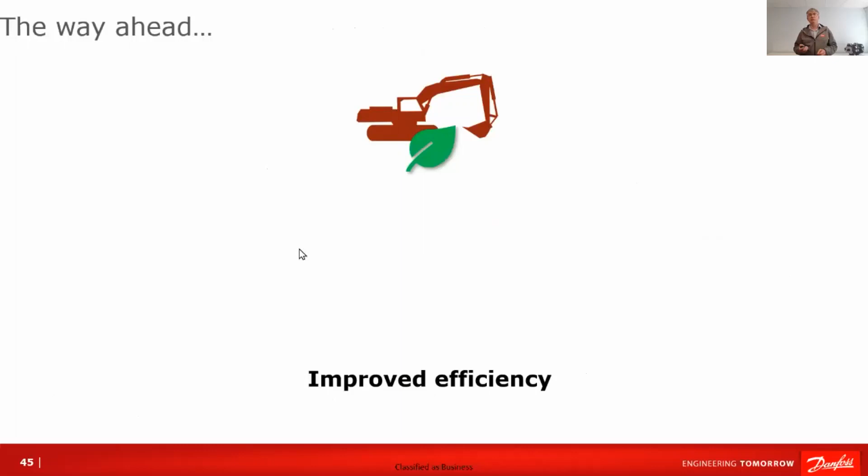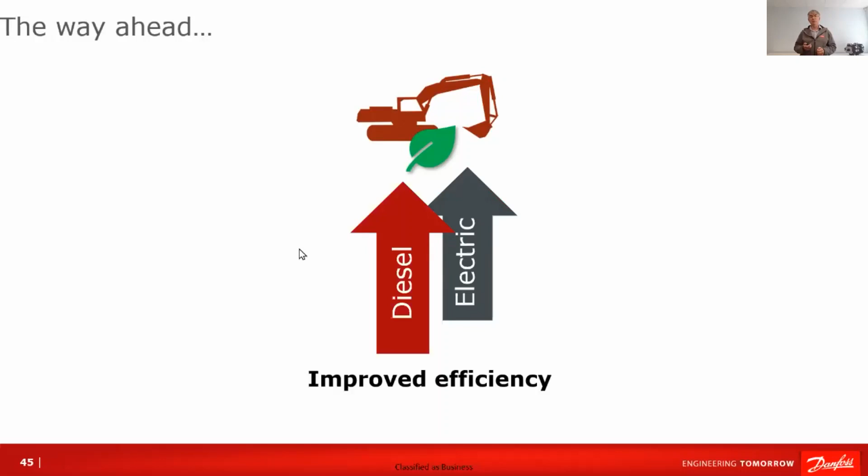Underpinned by this theme of improved efficiency, we think first of all we have to tackle efficiency on the diesel fleet, which will be the majority of emissions for the foreseeable future. And that has a synergy with electrification—it will accelerate electrification if we can improve efficiency and get to that TCO tipping point sooner.

So we've got some talking points for regulators and governments to think about, as they consider how to get the right behaviours from the industry—what incentives and regulations to put in place. I would just say, first of all, recognise the issue of system efficiency. It's the low-hanging fruit—there's massive potential to reduce the CO2 of today's diesel machines by improving system efficiency.

So that means when designing the incentives and the regulatory scheme, think about incentivizing improved system efficiency, and see that as a first step towards the electrification of these machines. Then lastly, address some of the limiting factors for electrification, for instance electric charging infrastructure. I'm sure there's a lot that could be done there to improve that where the machines are actually used.

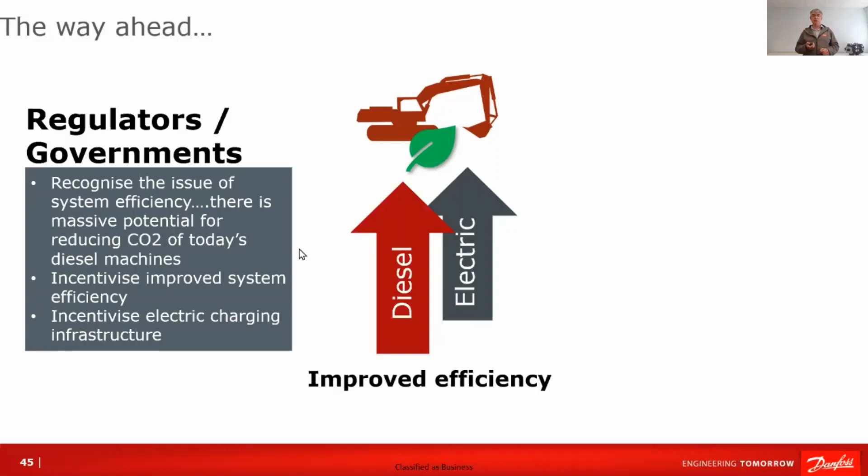For the OEMs, you maybe also have an agenda to talk about. One thing that's been really powerful is the science-based targets commitments. We've found that some OEMs have come to us specifically because their organization has, from the top down, committed to this stretching target to reduce CO2 of their machines in use. Their R&D people have come to us saying, we need to look outside of our own organization now, because this stretching target has changed the game. It's no longer about incremental improvement and perhaps doing that in secret. It's actually about open innovation—going out to the whole world and finding out what the best technologies are, and making partnerships with companies and organizations that are working on solutions.

Another thing we can do is cooperate on standard test cycles. This is something that in other markets makes it very easy for a consumer to select the most efficient technology, but unfortunately in off-highway machines it's much more difficult, and a lot of that information is not available. So that could be one step that helps, allowing end users access to information, either from standard test cycles or from telematics, to know which are the most efficient models.

And then lastly, to OEMs: think about the efficiency of your hydraulic system, and think about that as a common element between both diesel and electric variants.

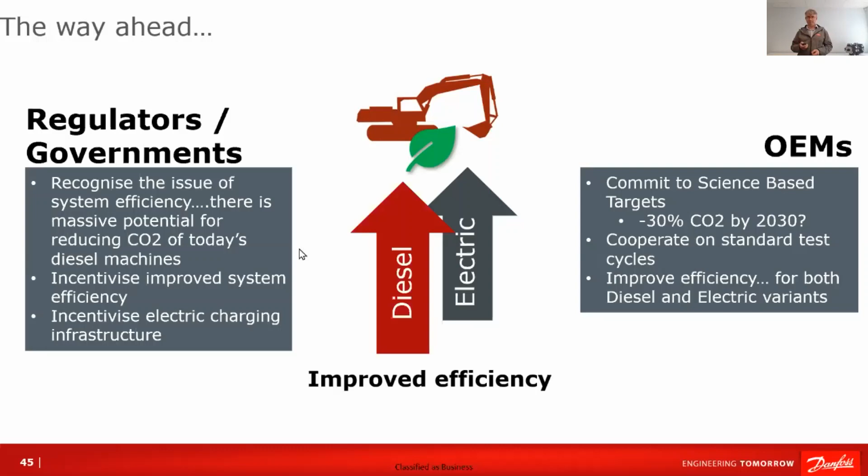We'd like to hear from you, and definitely at this phase Danfoss is in a listening mode. We've done this study of the outlook to 2030. We know that Danfoss doesn't have all the answers, and that Danfoss can't even make the improvement or provide the solution without a partnership with OEMs, end users, operators, and indeed with government, to get a way forward that we can work together and cooperate. So we're really listening—we want to hear what the industry has to say and how we react to what we have to say here. Very keen to see your questions; myself and Markus will be happy to answer them.